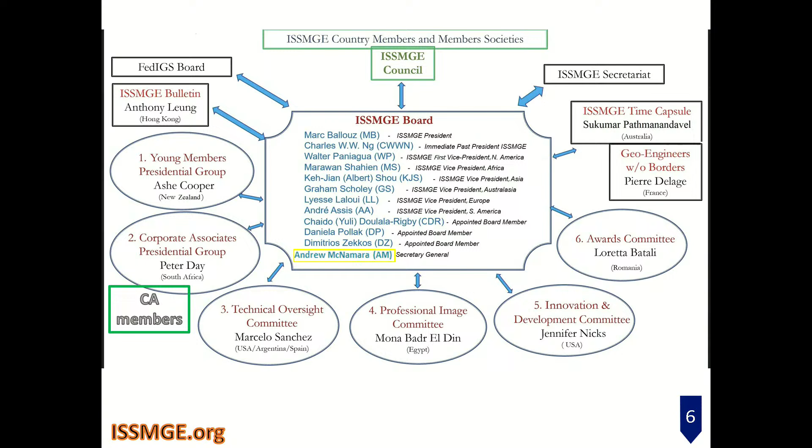The structure, you can see it on our website, issmge.org, is the council with the 90 country members, and the executive board with the president and 6 vice presidents. We are lucky today to have Professor Laloui, the vice president representing Europe, with us. So we are 2 from this group today.

This board will stay for another 2 years, since we were elected in May 2022, until Vienna, the biggest international conference, where I hope all of you will be joining us.

We also have 6 board-level committees helping the board and 3 ongoing projects. I won't go into details with these, but I'll cover mainly the working horse, the Technical Oversight Committee, which has about 40 subspecialties. Many of you are active members in those technical committees, and I see chairs of some of them. These are subspecialties of geotechnical engineering.

For the students, I don't see many young students here, maybe next time, but I encourage you to apply for the ISSMGE Foundation that will support you attending conferences worldwide.

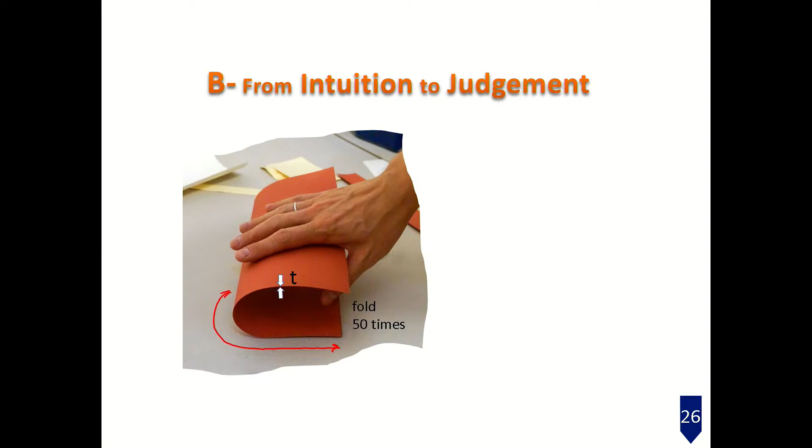Another intuition test: if you take a piece of paper and fold it 50 times, how thick will it be? 10 centimeters? 1 meter? It can actually reach beyond the moon. These tricks show us that intuition is bad in engineering. Always use calculation, and then judgment.

Another thing I like to talk about is a principle I teach my students: SoLGeH.

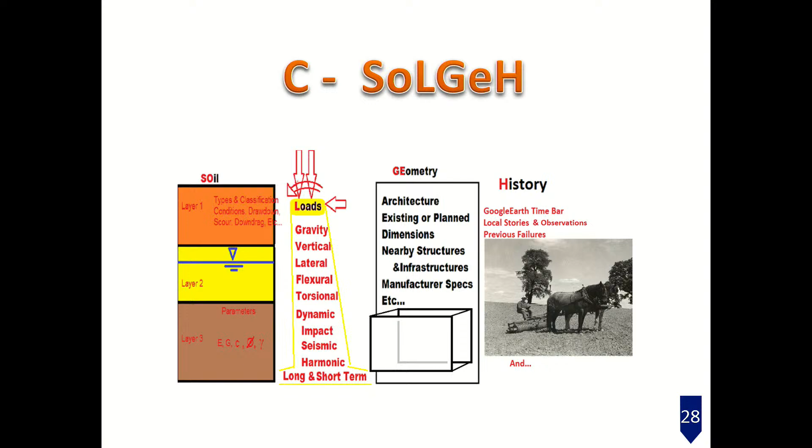Before you answer any engineering problem, get the data. Once you get the data, the soil, the loads, the geometry, and very important, the history, especially if you're checking a failure. Always visit the site, that's my recommendation. And then study, study, and study what's happening, the mode of failure, what theory to apply.

Don't jump on the software directly. This is where you get the strong triangle of safety, cost, and functionality. Anybody can build a bridge, but it will either collapse or cost very much if it's not an engineer doing it. So in summary, run sophisticated thinking before running Plaxis, sorry Daniel, but use as many data as possible and many methods, including the latest technology. So this is my message.

Live your engineering means it's time to drink. What do I mean by live your engineering? It means engineering is in our everyday life. So if you're putting water in your glass, you can check that there is atmospheric pressure, simply. Or you can check the centrifugal force.

You can drink. You can check many things. I use forks to keep my jacket straight, but you can also check sum of forces equals 0, sum of moments equals 0. Using simple forks, you can also... one more, let me see. This one, I need your prayers for. I'm sorry, I may make a mess.

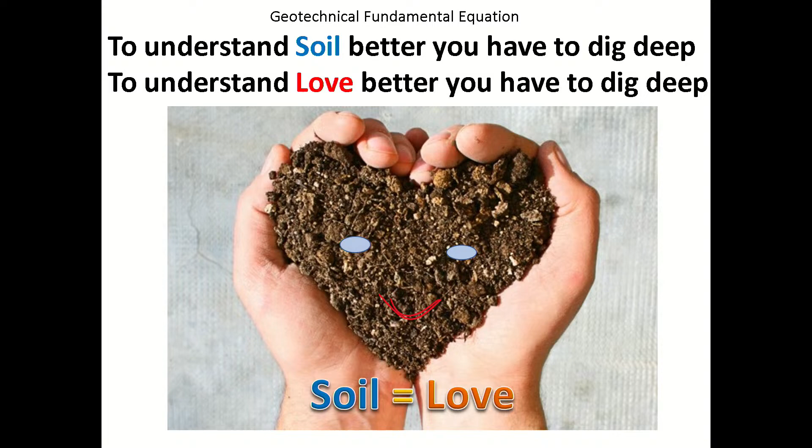So enjoy it. I have one last slide, about the fundamental equation of geotechnical engineering. So this is my only equation before I give the floor to the wonderful technical presentations. So to understand soil better, you have to dig deep. To understand love better, you have to dig deep. So soil equals love. Enjoy this conference. Thank you very much.

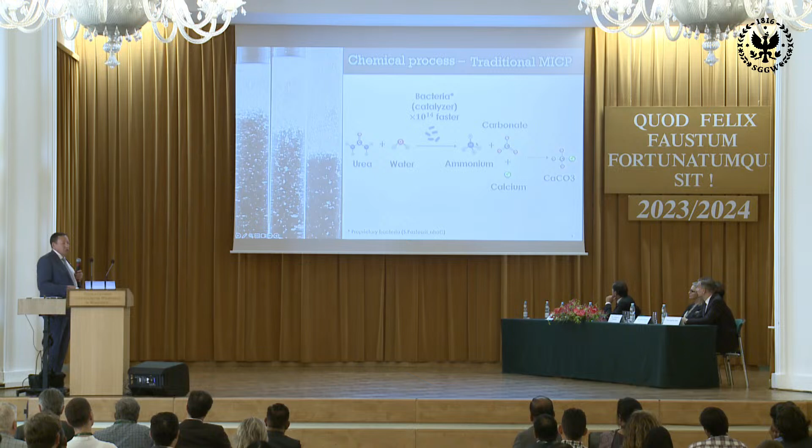There is an issue with having ammonium put in the soil, because this also creates pollution. So in our case—and we are the only ones doing this, we are actually patenting it—we extract ammonium before putting it in the ground. Medusoil is the name of our company. So we extract this ammonium, and we reach the same result in the ground without ammonium.

So the idea is that the precipitated calcium carbonate now goes into a porous material, into your soil. Basically, we try to have this calcium carbonate precipitating inside our porous material. This is the goal, and this is the challenge, basically.

So again, let me compare this on a granulometric curve with respect to many technologies you are all probably familiar with, from chemical grout to compaction grout to jet grouting, for instance. What biocementation could cover is this type of grain size—so we are covering almost the entire range of materials we work with. So that's it about the big picture of the technology.

So now we have to look at how we can really design an injection process, how we can ensure the results we are looking for. As I mentioned before, just to remind you, especially those who are not familiar with this—there are two technologies, or two ways to handle things, for the same technology. The first one is what we call conventional or traditional MICP, where the reaction with ammonium happens in the soil.

I would say this is the largest practice, the one we do in our case where we extract it from the soil. In terms of designing things, we generate two ways from a mathematical perspective. Basically, if you extract the ammonium before injecting it into the ground, what you have to consider in your reactive transport is mainly the calcite precipitation. You don't need more, because everything is made in the bioreactor before injection, so you do not simulate it in your analysis. However, in traditional MICP, we simulate bacteria attachment on the grains and their decay, and we simulate all the other reactions, including calcite precipitation. So how do we do this?

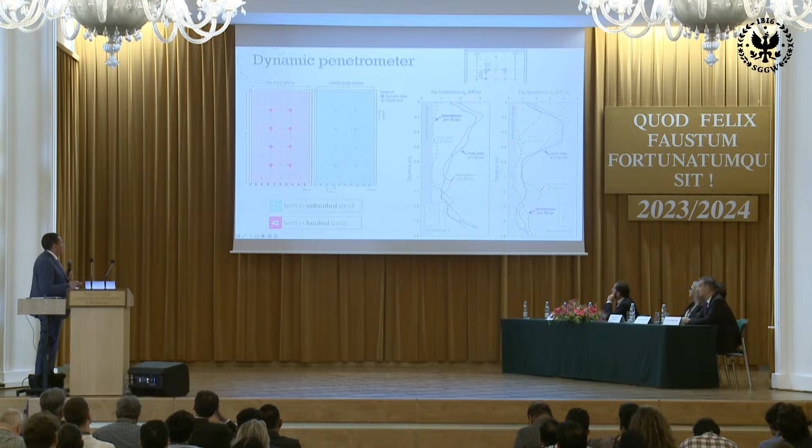What you see here are two values of the dynamic penetrometer results at a short distance—one at 20 centimeters and the other at 75. These are the values before treatment, and now you get the tip resistance in the ground after treatment. As you can see, we are moving from almost 0.5, if not 0 megapascal, to 3 megapascal of improvement in the ground.

We then look at two different ways to ensure homogeneity, for instance by using slip pipe systems—here we can go up to almost 4 megapascal. We can go even further, for instance if we use a tube manchette system, after different injections—in this case three injections into the ground—we can reach almost 20 megapascal of tip resistance.

Now the question is, how are we able to simulate and predict the mechanical behavior of the material after cementation? Before going into that, let me show you some more ways the model was validated.

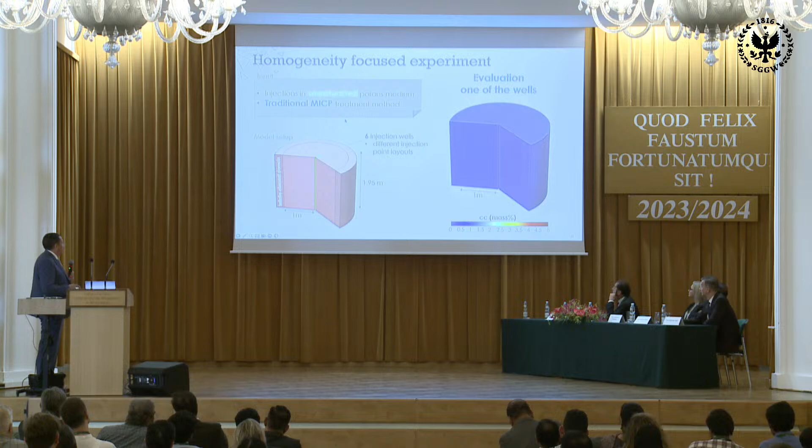Second and last case, we look at a single well. Here we are in partially saturated conditions with the traditional MICP process, and again we look at different configurations to optimize the process. We do it now numerically, because we don't need to run this parametric analysis experimentally—we have confidence in the model, and we can see how much calcite we can get.

An important aspect here is that we can control and manage the calcite—we don't need to work with the same calcite values all the time. So to come back: I discussed the injection process, I discussed the transport, and I discussed the reaction.

The last remaining item is the mechanical behavior—how much strength we get after injection. Here are unconfined compressive strength tests that we did a long time ago. Basically, what you see is that the compressive strength increases with the increase in the amount of calcite precipitation that you put into the ground.

The same thing happens with stiffness—this is the Young's modulus plotted against calcite precipitation, and again we see the same trend. From this, we concluded that we can actually create categories of improvement depending on the needs.

So for instance, if you are dealing with liquefaction and erosion protection problems, a small amount of calcite is sufficient to create the needed cohesion in the material. If you have to increase the bearing capacity, you can increase the dosage a bit and go for something with higher strength, almost 12 megapascal, as I was mentioning.

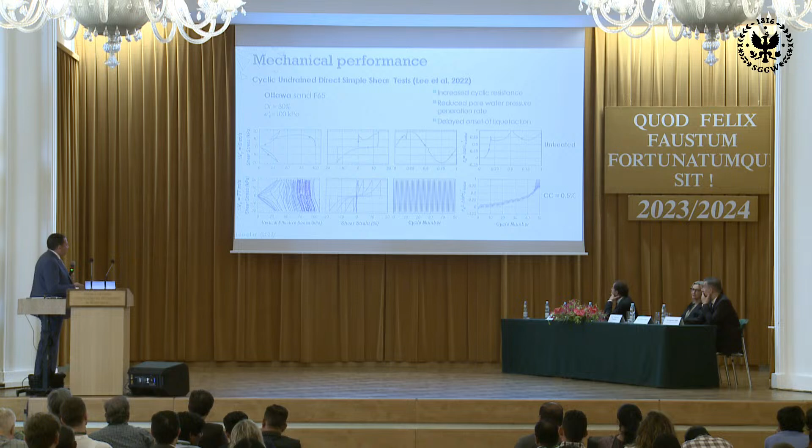The last experimental result, which is not from our group, is a cyclic direct shear test where the authors, Lee et al., tested first a material that is not treated, and then tested the same cyclic behavior of the material after a small treatment, 0.5% calcite content. The number of cycles needed to get to liquefaction is huge. With this, we are decreasing significantly the liquefaction potential with just 0.5% of calcite precipitation.

So we try to understand what are the physical processes behind this change in the rheology of the behavior, to be able to incorporate them in a constitutive manner. For that, we move to really fundamental science, going to very small scale, 0.1 millimeter, and use what we call microchip technology with microfluidics.

I will show you results of two cases that have the same porosity, but different distributions of grains. The system is based on injecting first, with a syringe pump, our bacteria solution from one side, then injecting from the other side our cementation solution, which is mainly urea, and we use cameras to follow what is happening in the PDMS chip. So basically this is the type of result we can get - I'm showing results almost in the middle of our 1 meter long chip.

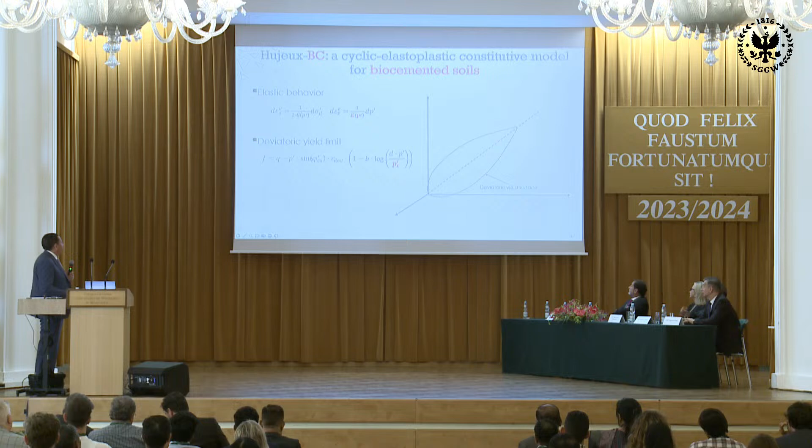It's a nonlinear elasticity model, an elastoplastic model. It has a yield limit very similar to CAM clay. For those familiar with CAM clay, there are just a few differences: instead of the capital M, it's a sinus here, and it has this shape because it has a fourth mechanism that cuts in the isotropic limit. So this is the elastic domain. It's a model like any other model.

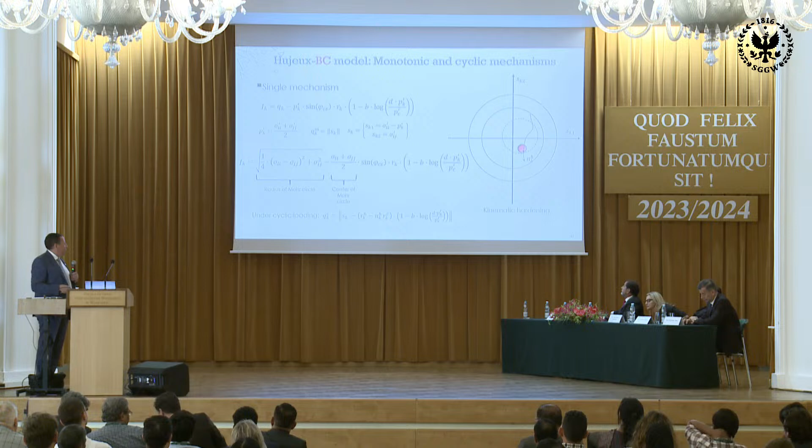It's of interest for us because it has a cyclic mechanism in the behavior. So what does it mean? I write the same equation I was showing before, in a different mathematical form that allows us to normalize things in terms of circles. So in one of the mechanisms, this would be our elastic domain, and when you load your material, you have a hysteretic domain, and when you unload it, you have plasticity and unloading. This is what we call kinematic hardening, and that's the motivation for us in using a model with kinematic hardening.

In this model, we introduce the two processes I mentioned before. First, densification, which we do in an elastic part and a plastic part. The elastic part we do by changing the bulk modulus and shear modulus, because by changing this coating of crystal around the grains, we are changing the bulk modulus and shear modulus, and we do it in this mathematical way, relating it to the amount of mass precipitating in the soil.

From the plasticity part, this precipitation around the grains is reducing the volume. So basically we represent a reduction of the volume, and if you reduce the volume on the normally consolidated line, you are changing your pre-consolidation stress.

The other aspect is bonding, as I mentioned. We do this for elasticity and plasticity. Again, we introduce a new coefficient for the elastic parameters. What's more important for the plastic part is that this bonding coefficient represents the fact that at very high shear stress, we will have destruction of those bonds. So we will move from a large normally consolidated line back to the untreated normally consolidated line, like we do for structural materials, for instance.

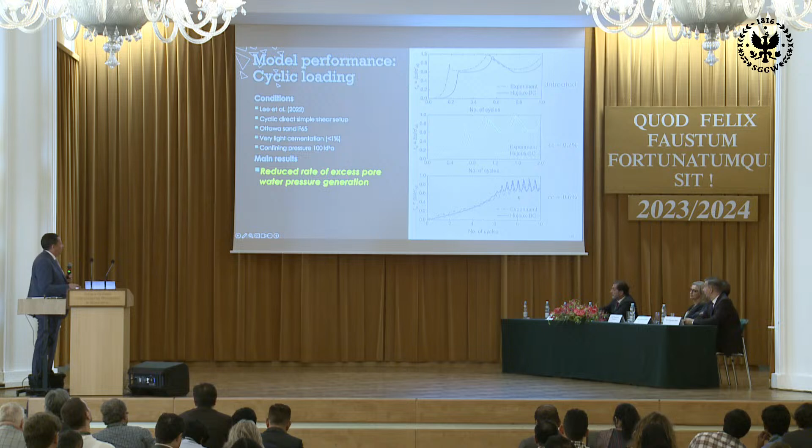However, now what we are showing is how this liquefaction potential is decreased by increasing the calcite amount in the soil, and you can see the model is able to represent even the number of cycles needed to reach liquefaction. The last curve related to model performance shows the same results as before, but here represented in terms of number of cycles to liquefaction.

This is the cyclic stress ratio. And again, you see the comparison between the experimental results and the numerical model is pretty good.

Last aspect: based on all those things, we moved to the industrialization process. What we first achieved is that we developed 3 patents to protect the technology - first the system injection, then the extraction of ammonium before injection, and also coupling this with geosynthetics. So we did that, and we built a company to commercialize those things.

The principle of industrialization is the fact that we have zero-waste manufacturing. Those manufacturing units could be on site, but we also have mobile manufacturing or production units. Currently, for instance, we've had a project for 2 weeks in Romania where we shipped our mobile unit. Basically, we grow everything in a bioreactor, then come on site, inject our solution from one part, and from the other part we provide calcium that's available anywhere, generating calcium carbonate in the ground.

What is biochar? There is no universally accepted definition of biochar. There are some agencies like the International Biochar Initiative that have a definition. US Biochar Initiative has its definition. European Biochar Certificate has its definition. The International Union of Pure and Applied Chemistry has a definition. US Department of Agriculture has a definition. Biochar International, one organization, has a definition. And the Institute of Food and Agriculture at University of Florida has its own definition. So there are many different definitions given by different agencies.

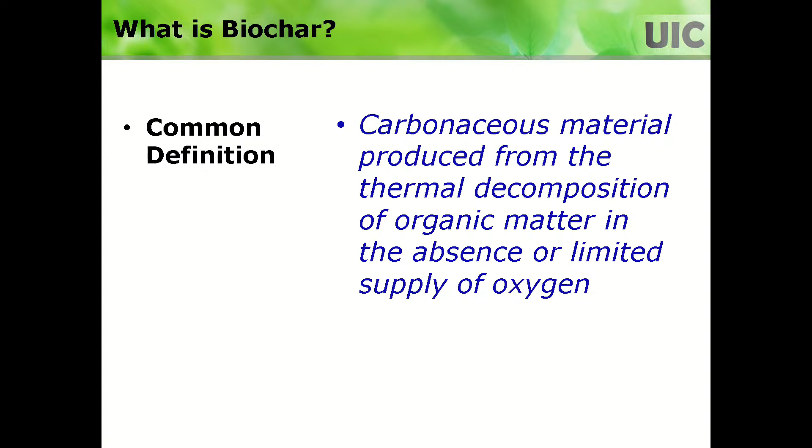But you don't have to get confused with all those definitions. You should know this common definition. Biochar is nothing but a carbonaceous material, basically a carbon material, that is produced from thermal decomposition of organic matter in the absence of, or with limited supply of, oxygen. So basically it's created from a thermal process of organic matter in the absence of oxygen. That's the basic definition, if you can remember that, that's fine.

As I said, biochar is basically produced from biomass, and biomass could be anything, as you see here. You feed it into this thermal heating unit called pyrolysis, and in this process you heat it up to a certain temperature without letting any oxygen in. When you do that, you get biofuel, syngas, and pyrolysis products. This has been going on as a way to produce alternative energy. A lot of people who work in the energy area work on this because they're converting organic waste into energy, but as a byproduct you get this material called biochar, similar to charcoal.

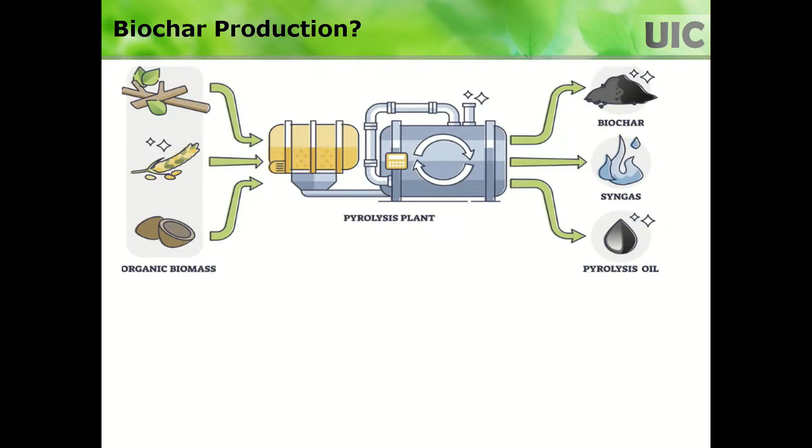Pyrolysis is basically heating up organic matter at temperatures ranging from 300 to 800 degrees centigrade. Depending on how you do pyrolysis, it can be classified into two types. Slow pyrolysis is where you slowly increase the temperature to the highest desired value, which could take several hours. Fast pyrolysis is when you don't wait, you just heat the biomass up to the desired temperature quickly, taking only a few minutes.

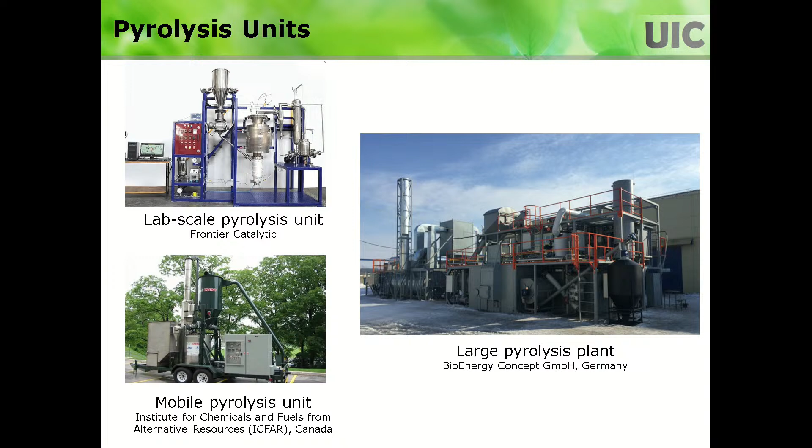These are the pyrolysis units, you can get lab scale, mobile scale, or very large units, which is nice. If you want to create biochar at your project site, you can do it, you don't have to have a huge plant like this one. You can have a mobile plant and do the project wherever you want.

And there are other biochar production methods other than pyrolysis. One is called gasification, another is called hydrothermal carbonization, another is called torrefaction. So you need to remember there could be processes other than pyrolysis to produce biochar.

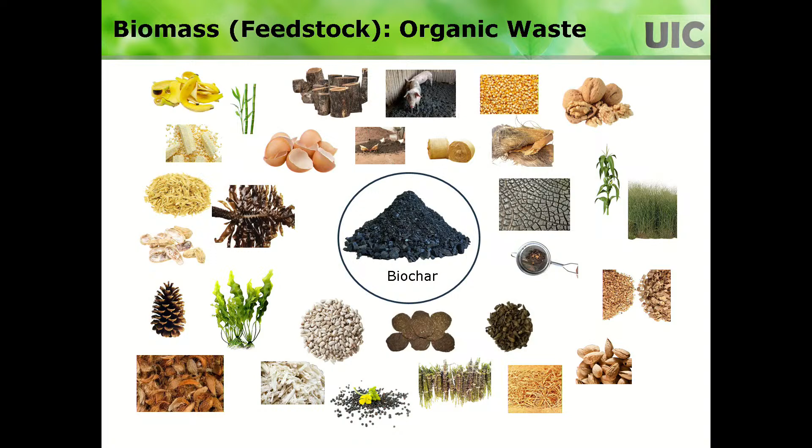So biochar is produced from biomass. Biomass is basically organic waste. Look at all these types of organic mass - banana peels, like all these things. You can have chicken litter or pig litter, sludges. You can see all kinds of stuff like rice husk, all the organic waste that you have, that can be converted into biochar. So biochar is made from organic waste. In terms of waste management, organic waste is very difficult to get rid of. So here you can use the organic waste to produce biofuels, bioenergy, and also biochar.

So I'm giving you some idea about the different types of biochar. All this information is in my paper that's going to be published in this conference proceedings. There are different types of wood-based organic waste, then different types of plant-based organic waste - right here you can see it. And you could have animal-based organic waste - you can see this one. And you could have other waste like sewage sludge, municipal solid waste, all these organic waste. Any type of organic waste that you have can be used as biomass or feedstock for creating biochar.

In terms of the quantities of organic waste we generate, it's a lot of it. Agriculture waste, for example - we create 1,000 million tons per year, and that keeps on accumulating if you don't do anything. Municipal solid waste is 2,000 million tons per year, but out of that, more than 40% is organic mass. So you have an organic fraction, and all this can be converted into biofuel and bioenergy.

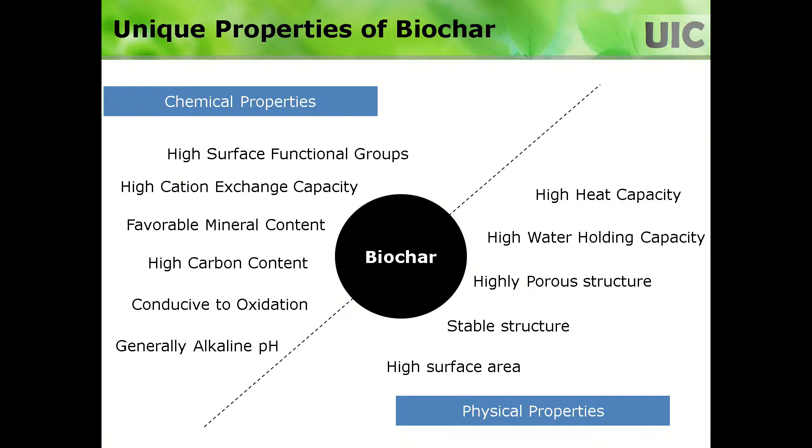And it has unique physical properties - high heat capacity, high water holding capacity, highly porous structure, which is very important. And it has a stable structure - it does not degrade, so the biochar is going to last for a long time. And then it has high surface area. These are very unique physical and chemical properties that you can exploit for various applications.

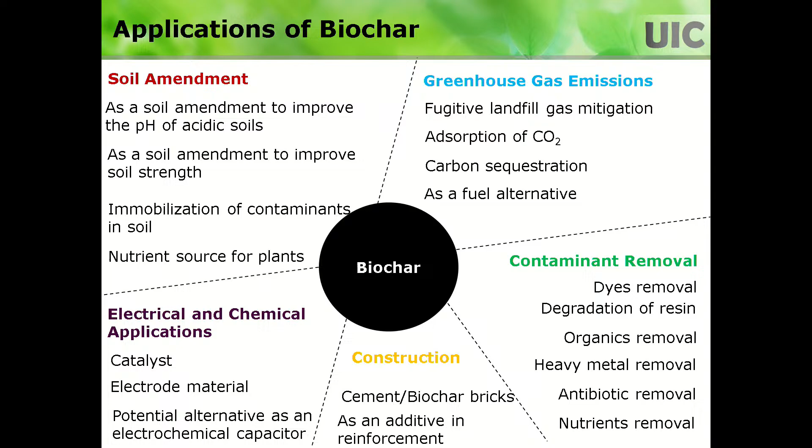Now there are many different applications. You can use it as a soil amendment for different purposes I listed there, and you can use it for greenhouse gas emissions control - there are many applications there I mentioned. For contaminant removal - water, air, soil, wastewater - you can use this material for that. And you can use it as a construction material also. Not only in the civil engineering field, people are using it in electrical and chemical applications too. So many applications for this material that is made from biomass, from organic waste.

Let's say you are working on some project and you need a material, but the biochar does not have the properties that you want. Why? Because it has a limited contamination range. Let's say if I'm dealing with wastewater, industrial water, or contaminated soil, this material may not be good as it is, as a biochar. Limited adsorption capacities, limited anionic capacity, high ash content, impurities, high volatile content, low density, small particle size, low active sites, harder to separate from aqueous media, and high dependence of the properties of biochar on the preparation conditions and feedstock.

So those are the problems. But you cannot be discouraged by those problems. If those problems are not favorable to you, you can modify them. That's called engineered biochar. So you can modify the biochar in different ways.

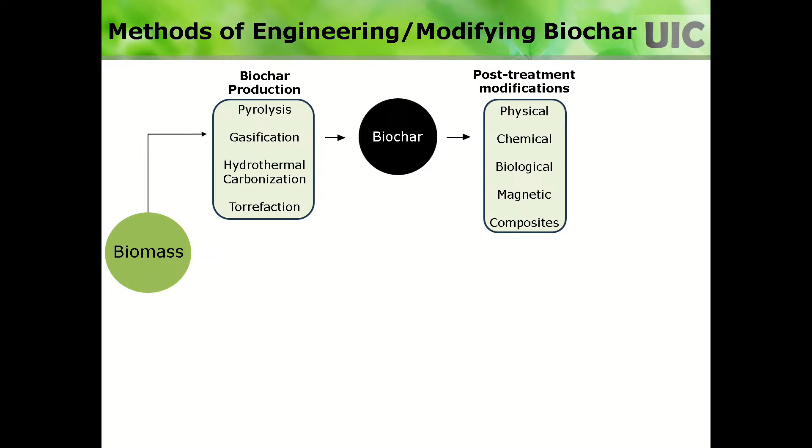So here you have a biomass, and you do the pyrolysis process, these different processes, and then you produce the biochar. And then this biochar does not have the properties that you want, so you need modifications. This is the post-treatment modification. There are different types of modifications: physical, chemical, biological, magnetic, and you can create composites. When you do that, you get an engineered biochar or modified biochar.

And this can be done in different ways. You can treat the biomass first, creating a modified biomass, and then subject it to pyrolysis, and you can also get a modified biochar. So whichever route you take, the treatment is either a post-treatment or a pre-treatment. You can do it either way, and you have these different options to do that.

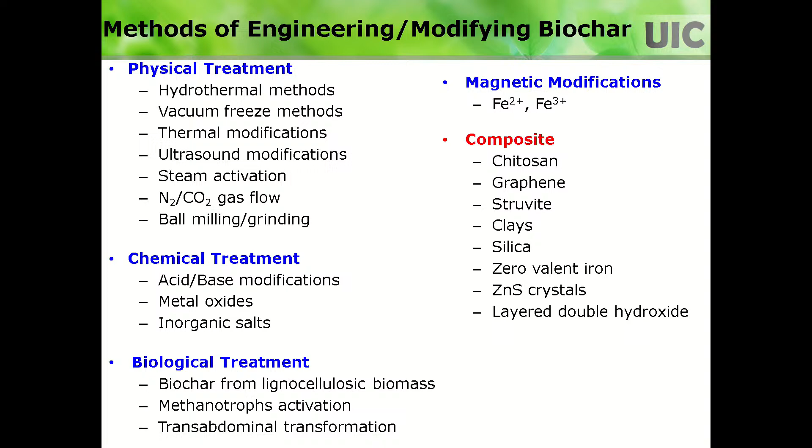Now, in the physical treatment, if I want to do the treatment, there are different ways to do it. If I want to do the chemical treatment, there are different ways to do it. If I want to do the biological treatment, different ways to do it. Magnetic modifications, you can do it too. And you can combine biochar with other materials to create a biochar composite.

And in my paper, I provide all these details, so don't worry about losing this information. Now, the treatment that you do has to give the improvement that you are looking for. Biochar as it is doesn't have the properties, but you are looking for some improved properties.

And you need to tailor the treatment to get the improvement that you want. For example, among the physical methods, you can just do ball milling, which basically reduces the size. People create nano biochar, which has high surface area and unique properties to serve certain functions based on the nano size.

So like that, if you look at the chemical methods, for example, if I use a certain kind of modification, I can get a high surface area. And then I can use the biological process, activate it with microbes, and get a bioactive biochar.

And you can use composites. You can add biochar with any of these materials, including clays. For example, we are working on a composite biochar, a chitosan composite, that can give very unique characteristics to the biochar that can help us in our applications.

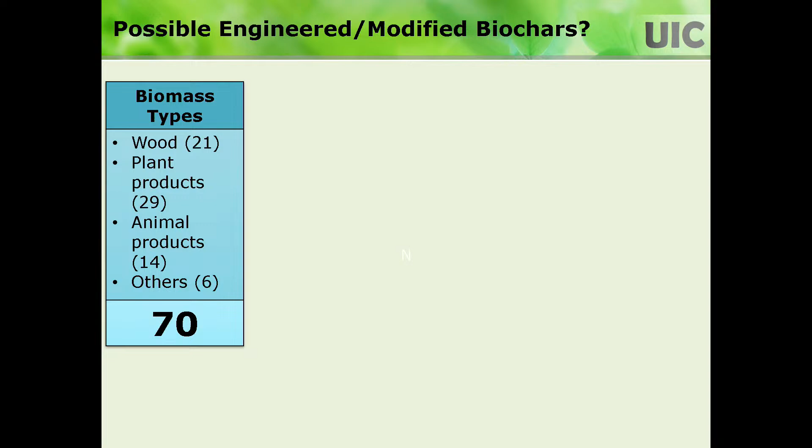So now let me summarize what I said. Biomass type: what are the different types of biomass? Based on the literature that we found, there are more than 70 types of biomass people have used to create biochar. Now, what are the different ways to produce the biochar? There are 4 different ways to produce a biochar.

And then in the production method, you have variables. What is the highest heating temperature? What is the residence time? What is the heating rate? The combinations of those can result in 1,890 combinations.

And then modifications: after you make the biochar, if it is not good enough, you have to do pre-treatment or post-treatment, which can be physical, chemical, biological, or magnetic. That combination is 31, so let's say permutations and combinations. How many types of biochar can you have? So 70 times 4 times 1,890 times 31, that leads to 16 million types of biochar.

The point I want to mention is when you are looking at the literature on biochar, be mindful about what is the feedstock, how it is produced, and what are its characteristics. You may be talking about different material. Everybody uses the word biochar in the title, but out of 16 million possible biochars, which one are you talking about? This is important to remember.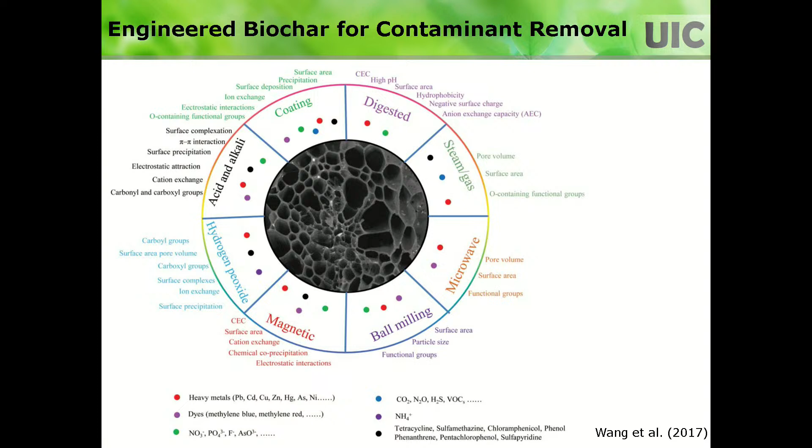It's unique, because if I work on contamination remediation, look at this: when you modify the biochar, you get unique properties that can take out different types of contaminants, as I'm showing here. So for environmental remediation applications, modified biochar is the best option you can think about.

We do a lot of research on biochar at UIC, for a long time now, at least 15 to 20 years. These are the kinds of projects we worked on: using it as a filter media for stormwater treatment, as a biocover for enhanced landfill methane oxidation, to stabilize heavy metals in contaminated soils, and as an organic amendment in phytoremediation projects. We also have a project going on right now creating biochar-chitosan or biochar-chitosan-bentonite composites for barrier applications.

You can also use it for geotechnical purposes. If you're interested in improving mechanical strength, you can use this too.

One thing I want to mention is a lot of studies just deal with lab scale work. But you really need to go out to the field and see if what you found in the lab is applicable or not. When doing full scale applications, you need to look at your source of biochar, because a lot of people make biochar in the lab using small reactors, 100 or 200 grams, and do research on that. But in the field you need tons of material, so you need to find where you can get that much material and match it to what's available for field applications.

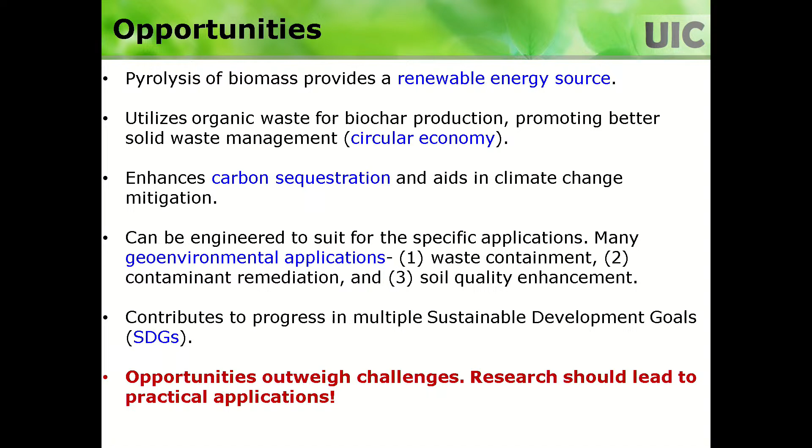The last point I want to mention is that opportunities outweigh challenges. The challenges should not be discouraging to you because the opportunities are really much greater, but you should focus the research not just on limited lab scale, but take them into applications.

You can achieve desired properties of biochar by selecting appropriate modification techniques. And you can achieve sustainability benefits provided you are careful about how you use it and in which applications. You need to do the assessment and make sure it is right. The biggest concern is that we don't have standards for production, properties, and applications. Hopefully those are going to come up very soon.

Let's see now how sustainability criteria may be applied to the design of landfill lining systems.

The application of sustainability criteria to the design of contaminant barriers implicates balancing two conflicting needs. The first need is to maximize the protection of groundwater quality.

The traditional method to meet this need is to increase the thickness and reduce the hydraulic conductivity of the low permeability mineral layers of the lining system. The consequence is accepting high economic cost, elevated consumption of natural raw materials, and substantial emission of greenhouse gases for the transportation of raw materials and the construction of the lining system.

The second need is to reduce the economic and environmental impact of barrier construction. This second need requires reducing the use of engineered barriers and relying on natural attenuation processes which are affected by high uncertainty. In this case, the consequence is accepting a possible high risk for human health and environment given by the contamination of the groundwater.

Now, from my point of view, a fundamental innovation that has been developed to face this problem is represented by the transition from a prescriptive-based design approach to a performance-based design approach.

The performance-based design guarantees to protect the groundwater resource, avoiding recourse to oversized lining systems with relevant economic and environmental savings. The modeling of contaminant transport that takes place through mineral and geosynthetic liners allows for a rational design of the barrier system components.

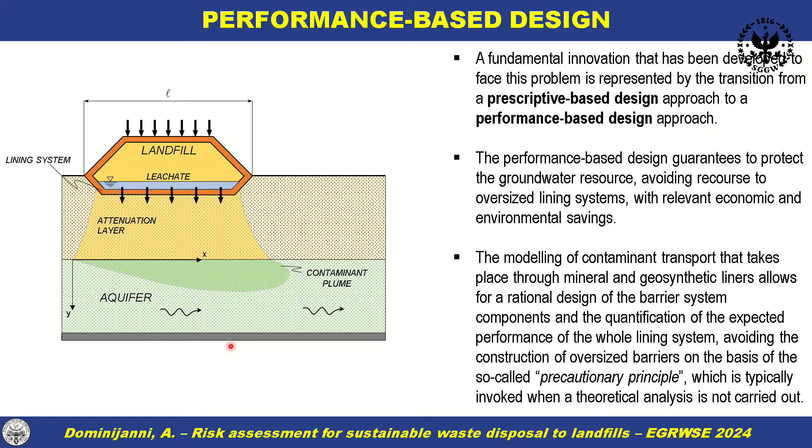and the quantification of the expected performance of the lining system, avoiding the construction of oversized barriers on the basis of the so-called precautionary principle, which is typically invoked when a theoretical analysis is not carried out.

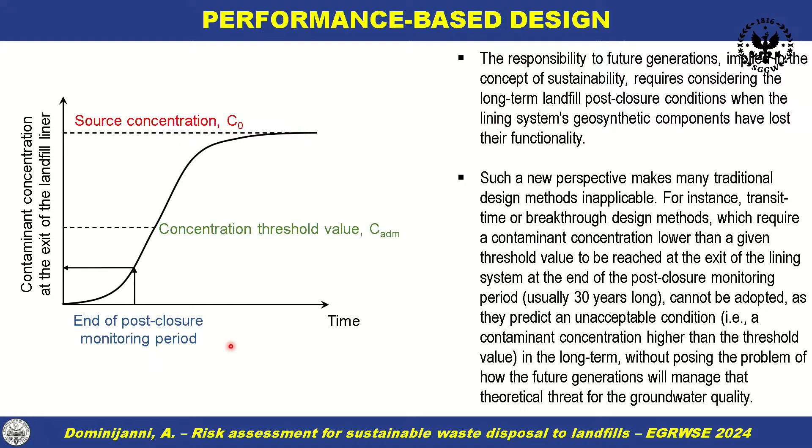However, we must take into account that the responsibility to future generations, implied in the concept of sustainability, requires considering also the long-term landfill post-closure condition when the lining system's geosynthetic components may have lost their functionality. Such a new perspective makes many traditional design methods inapplicable. For instance, transit time or breakthrough design methods, which require a contaminant concentration lower than a given threshold value at the exit of the lining system at the end of the post-closure monitoring period, cannot be adopted, as they predict an unacceptable condition in the long term—that is, a contaminant concentration higher than the threshold value, without posing the problem of how future generations will manage that theoretical threat to groundwater quality.

An alternative method is to adopt the performance criterion that the risk for human health and environment remain less than an acceptable threshold level at the point of compliance, not only during the prescribed post-closure monitoring period, but also in the long term.

The risk for human health is typically determined by the ingestion of groundwater or inhalation of vapors coming from the groundwater, and can be related to a corresponding contaminant concentration in the groundwater through a toxicological model. The risk for the environment is similarly related to protective threshold values of the contaminant concentration in groundwater, which are typically defined by the regulation in force.

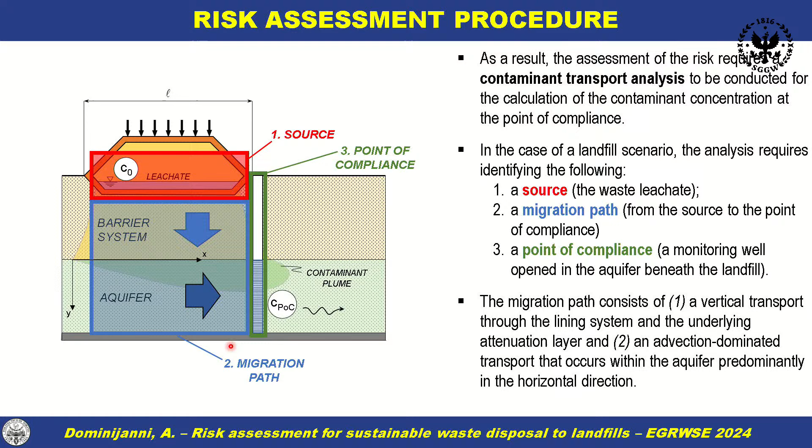As a result, the assessment of risk requires a contaminant transport analysis to calculate the contaminant concentration at the point of compliance. In the case of a landfill scenario, the analysis requires identifying a source, that is the waste leachate, a migration path, and the point of compliance. The migration path consists of vertical transport through the lining system and the underlying attenuation layer, and an advection-dominated transport that occurs within the aquifer, predominantly in the horizontal direction.

These concepts are beginning to be included in the environmental regulation of various countries. For instance, in 2020, the requirement to carry out a risk assessment analysis was introduced in the Italian regulations for landfills, the so-called Decreto Legislativo 36 del 2003, for the following cases: when local authorities must authorize particular subcategories of landfills, when requesting a derogation from the permissible concentration limit values in the waste leachate for landfills of non-hazardous waste, and at the end of the post-closure monitoring period, whose duration is typically assumed to be 30 years after the end of the waste disposal activities.

Now, several modeling approaches can be adopted to analyze the contaminant migration process in the context of a risk assessment procedure. A first classification of possible modeling approaches may distinguish between steady-state and transient models. Transient models take into account the finite mass of the source and time-dependent phenomena, such as radioactive decay, biological degradation, sorption, desorption, and ion exchange. They are computationally demanding and require several chemical, physical, and biological data.

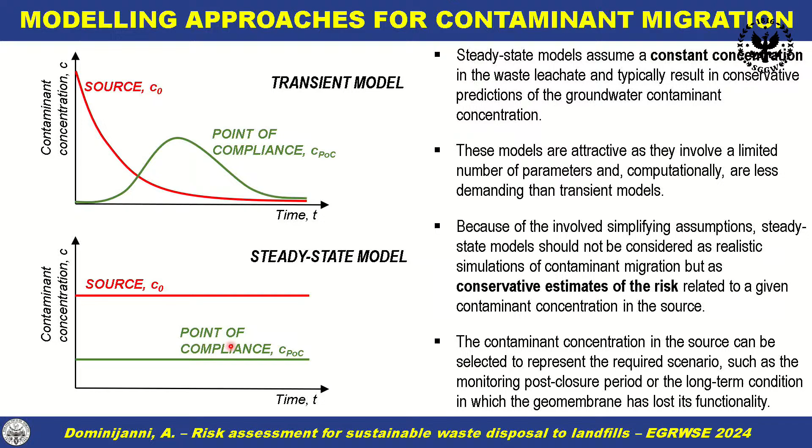I want to stress that because of the involved simplifying assumptions, steady-state models should not be considered as realistic simulations of contaminant migration, but as conservative estimates of the risk related to a given contaminant concentration in the source. This concentration in the source can be selected to represent the required scenario, such as the monitoring post-closure period or the long-term condition in which the geomembrane has lost its functionality.

Now, I would like to describe a set of analytical and numerical solutions to contaminant transport from landfills that have been developed to assess the risk for human health and environment.

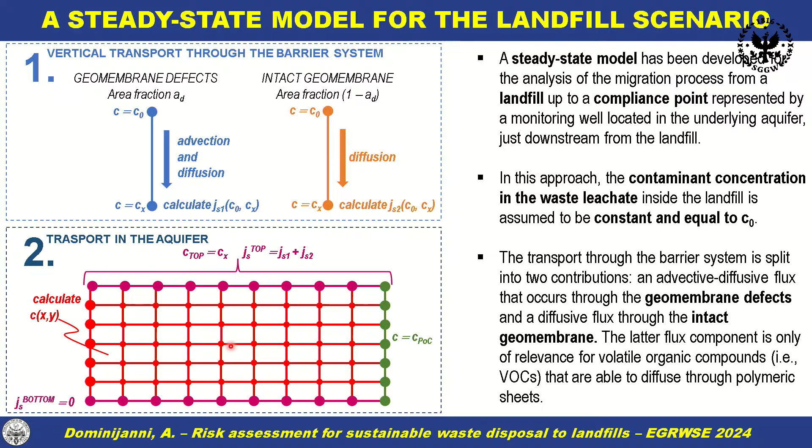This solution has been derived from a steady-state model developed for the analysis of the migration process from a landfill up to a compliance point represented by a monitoring well located in the underlying aquifer just downstream from the landfill. In this approach, the contaminant concentration in the waste leachate inside the landfill is assumed constant and equal to C0. The transport through the barrier system is split into two contributions: an advective-diffusive flux that occurs through the geomembrane defects, and a diffusive flux through the intact geomembrane. The latter flux component is only relevant for volatile organic compounds that are able to diffuse through polymeric sheets.

The vertical contaminant flux through the barrier system, given by these two contributions, is expressed through an analytical solution, which can be imposed as the top boundary condition for the contaminant mass balance in the underlying aquifer. The contaminant concentration in the aquifer can be obtained, in the most general case, from a finite difference numerical solution.

I will now describe the most significant step of the proposed method.

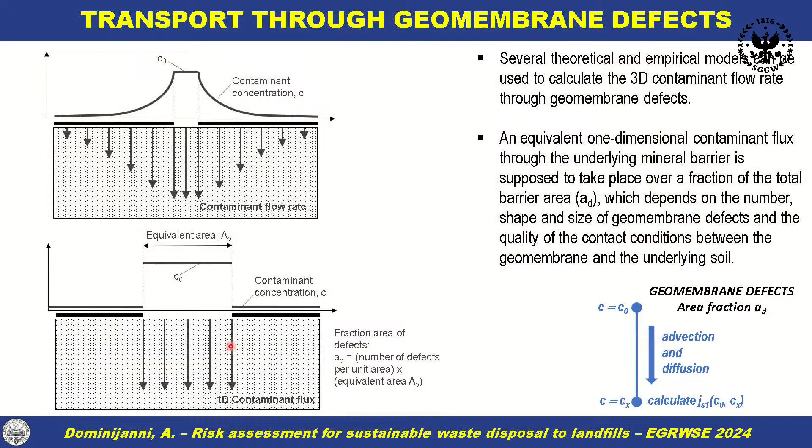The second step consists of calculating the diffusive flux through the intact geomembrane. This transport process is relevant only for volatile organic compounds, which can partition into the geomembrane polymer and diffuse through it relatively rapidly due to the limited geomembrane thickness. The steady-state flux through the intact geomembrane is assumed to take place over the area fraction that is complementary to the area fraction evaluated for transport through geomembrane defects.

When the vertical contaminant transport through the barrier system has been evaluated, the contaminant concentration in the underlying aquifer can be derived from a mass balance. If the thickness of the aquifer is no more than a few meters, the pollutant concentration can be assumed to be invariant with vertical position and to depend only on the horizontal distance below the landfill.

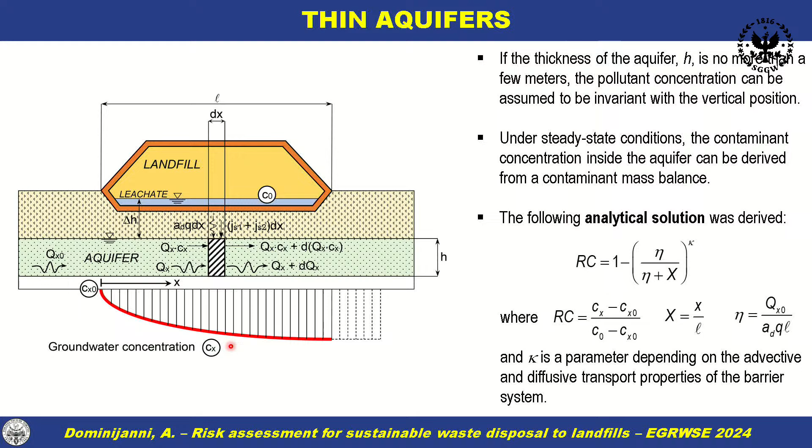Under steady-state conditions, the analytical solution shown in this slide can be derived. In this equation, RC is the relative concentration, C0 is the contaminant concentration in the leachate waste, CX0 is the contaminant concentration in the groundwater upstream from the landfill, eta is the relation between the horizontal and vertical flow rate within the aquifer, and kappa is a parameter depending on the advective and diffusive transport properties of the barrier system.

When the thickness of the aquifer is not limited to a few meters, the variation in pollutant concentration in the vertical direction becomes significant, and a two-dimensional geometry needs to be taken into account. In this case, the contaminant concentration distribution depends on the transversal dispersivity within the aquifer. A general solution can be found using the finite difference method by imposing the continuity of contaminant concentration and flux between the bottom of the barrier system and the top of the aquifer.

I would like now to present an example of the application of the proposed solutions. This example shows how the derived steady-state solutions can be employed to assess the risk for the following two scenarios: the monitoring post-closure period, which is typically assumed to end 30 years after the termination of the waste disposal activities, and a long-term condition in which the geomembrane has lost its functionality.

The artificial lining system, in accordance with Italian regulations for landfills of non-hazardous waste, includes from the top a 0.5 meter thick drainage layer, a 2.5 millimeter thick geomembrane in HDPE, a 1 meter thick compacted clay liner, which represent, using the terminology of the European Directive 31 of 1999, the so-called artificial mineral barrier, and another 1 meter thick compacted clay liner that represents the so-called artificial completion of the geological barrier.

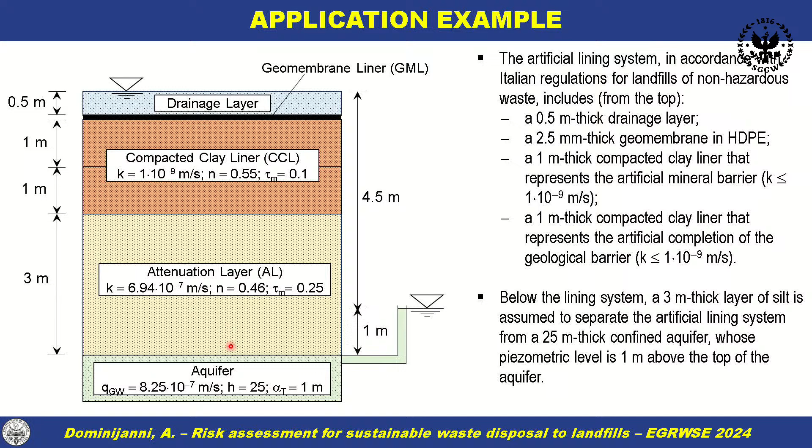Below the lining system, a 3 meter thick layer of silt is assumed to separate the artificial lining system from a 25 meter thick confined aquifer whose piezometric level is 1 meter above the top of the aquifer. The temperature at the base of the landfill is assumed to be about 20 degrees Celsius.

Therefore, the geomembrane service life is expected to last about 120 years, based on the indications given by Rowe and Brachman. As a result, during the monitoring post-closure period, the migration of inorganic contaminants consists only of the advective-diffusive transport through the geomembrane defects. However, organic contaminants can diffuse through the intact geomembrane, with a consequent relevant increment in the overall contaminant mass flux passing through the lining system and reaching the underlying aquifer.

The proposed analysis is performed for both cadmium and benzene to appreciate the different behavior of inorganic and organic compounds. The derived analytical solution for thin aquifers can be used to assess the variation of the contaminant concentration in the aquifer along the direction of the groundwater flow.

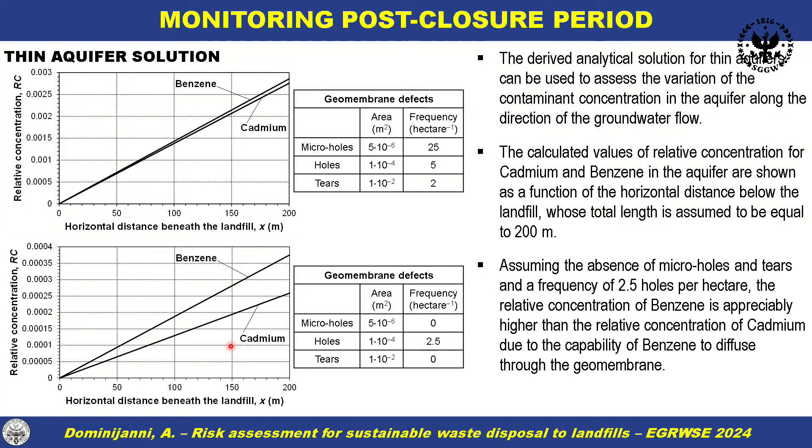The calculated values of relative concentration for cadmium and benzene in the aquifer are shown as a function of the horizontal distance below the landfill, whose total length is assumed to be equal to 200 meters. Assuming the presence of microholes, holes, and tears with the areas and frequencies shown in the table at the top of the slide, the concentration profiles for cadmium and benzene are similar.

Considering a better performing composite barrier with only 2.5 holes per hectare, the relative concentration of benzene is found to be appreciably higher than the relative concentration of cadmium, due to the capability of benzene to diffuse through the geomembrane.

The maximum relative concentration is found at the exit from the landfill footprint, which typically represents the point of compliance for the risk assessment. The procedure allows the admissible concentration of contaminant in the waste leachate to be assessed. This admissible concentration in the waste leachate is given by the relation between the threshold concentration in the groundwater, given for instance by the regulation in force, and the calculated relative concentration at the point of compliance.

Using the value of 5 micrograms per liter for the threshold concentration in the groundwater given by the Italian regulations, the admissible concentration for cadmium is found to be 1,786 micrograms per liter. Similarly, assuming a threshold concentration in the groundwater of 1 microgram per liter for benzene, the admissible concentration in the waste leachate is found to be 345 micrograms per liter.

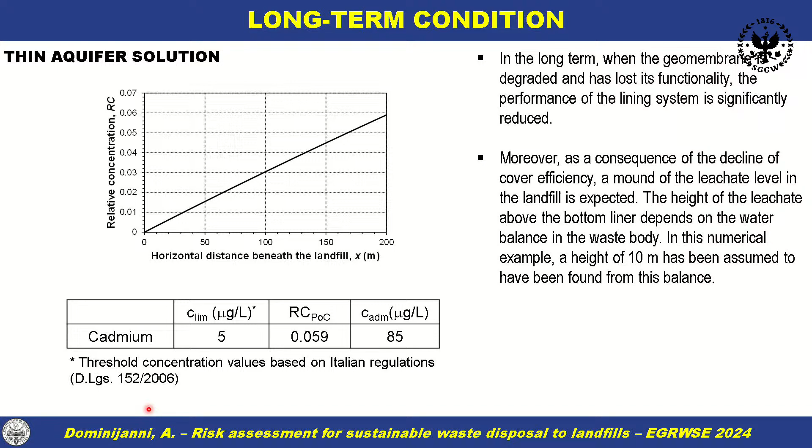The second considered scenario is that in the long term, when the geomembrane is degraded and has lost its functionality. Under such conditions, the performance of the lining system is significantly reduced. Moreover, as a consequence of the decline of cover efficiency, a mound of the leachate level in the landfill must be expected. The height of the leachate above the bottom liner depends on the water balance in the waste body, and in this numerical example, a height of 10 meters has been assumed, found from this balance.

Because of biodegradation, the concentration of organic contaminants is expected to drop substantially. Attention is therefore focused only on the migration of inorganic contaminants, such as cadmium.

Using the solution for thin aquifer, the maximum relative concentration is found to be equal to 0.059 at the exit from the landfill footprint. The corresponding admissible concentration in the waste leachate is 85 micrograms per liter, which is a value considerably lower than the value of 1,786 micrograms per liter found for the post-monitoring condition.

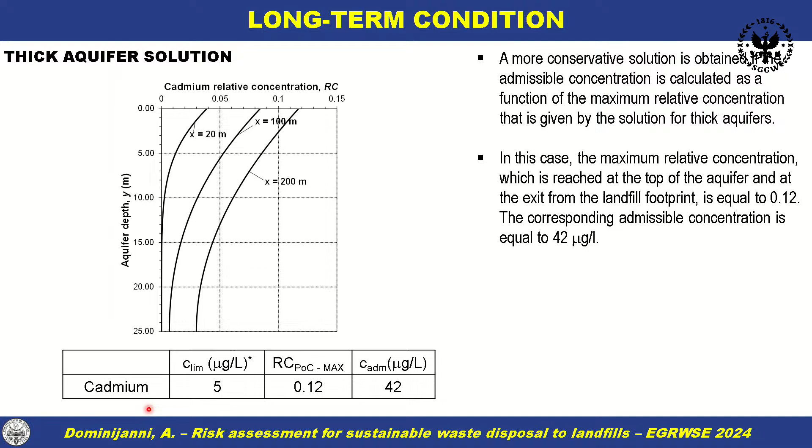A still more conservative solution is obtained if the admissible concentration is calculated as a function of the maximum relative concentration given by the solution for thick aquifers. In this case, the admissible concentration in the waste leachate is found to be equal to 42 micrograms per liter, which is about 50% of the concentration obtained from the solution for thin aquifers.

In conclusion, I would like to provide some final comments. This presentation has been focused on a proposed risk assessment procedure that is coherent with the ethical requirement of sustainability in taking care of the impact of our current activities on the quality of the environment for future generations. The rationale of the procedure consists of determining the contaminant concentrations in the leachate that are compatible with an acceptable risk level in the exposed groundwater resource, also considering the long-term conditions.

However, a last critical consideration should be made about the threshold concentrations that are established to preserve the quality of the groundwater, especially when their values are not related to actual risk for human health, but are defined as screening values based on the so-called precautionary principle. It should be taken into account that the threshold concentration we adopt also constitutes an ethical choice.

For instance, it has been estimated that the limits adopted in radiation protection in Western countries entail a cost of up to 2.5 billion dollars for each hypothetical human life saved. This cost is to be compared with the approximately 100 dollars needed to save a human life in developing countries from infectious disease and other more widespread pathologies.

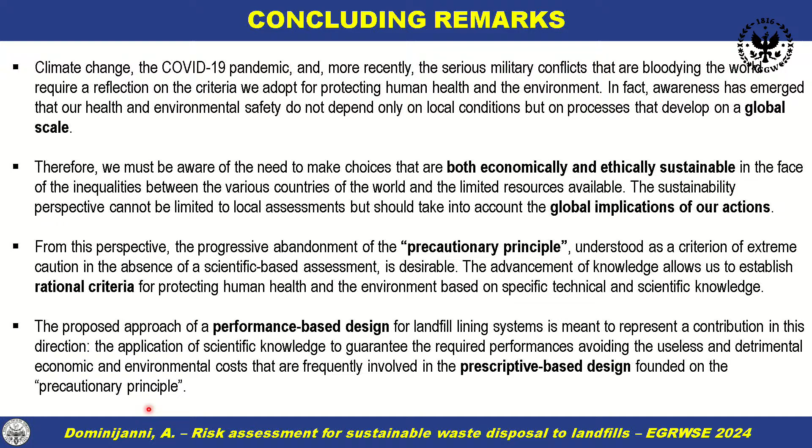From this perspective, the progressive abandonment of the precautionary principle, understood as a criterion of extreme caution in the absence of scientific-based assessment, is desirable. The advancement of knowledge allows us to establish rational criteria for protecting human health and the environment based on specific technical and scientific knowledge. The proposed approach of a performance-based design for landfill lining systems is meant to represent a contribution in this direction - applying scientific knowledge to guarantee required performances, avoiding the useless and detrimental economic and environmental costs frequently involved in prescriptive-based design founded on the so-called precautionary principle. Thank you very much for your attention.

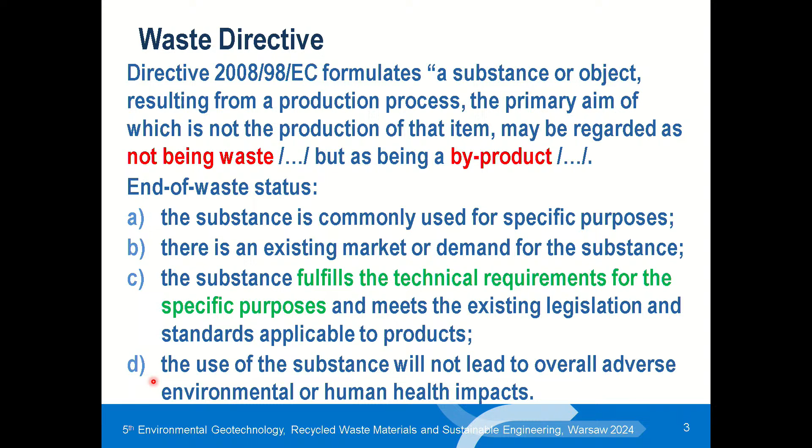End of waste status takes place if the 4 conditions listed in the slide are met. It is not very difficult to fulfill these requirements. One of them is that the substance fulfills the technical requirements for specific purposes and meets existing legislation and standards applicable to products. We know that in many countries we have these requirements.

The directive also reports possible categories of waste for which end of waste specification and criteria should be developed: inter alia, construction and demolition waste, some ashes and slags, scrap metals, aggregates, tires, textiles, compost, waste paper and glass. The Commission is preparing a set of end of waste criteria for priority waste streams, but unfortunately only for iron, steel, aluminium and copper scraps and glass cullet - waste types that have accumulated in very small quantities.

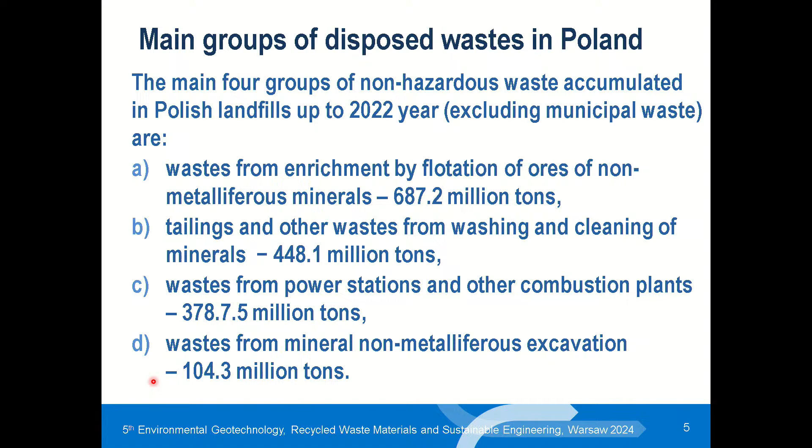After this introduction, let's take a look at the situation in Polish landfills. The main 4 groups of non-hazardous waste accumulated in Polish landfills up to 2022, excluding municipal waste, are: waste from enrichment by flotation of ores of non-metalliferous minerals - I will use the catalog names, waste catalog names - tailings and other waste from washing and cleaning of minerals, waste from power stations and other combustion plants, and waste from non-metalliferous mineral excavation. You can see the numbers of million tons accumulated only in Poland.

Oh, okay. It was sleeping.

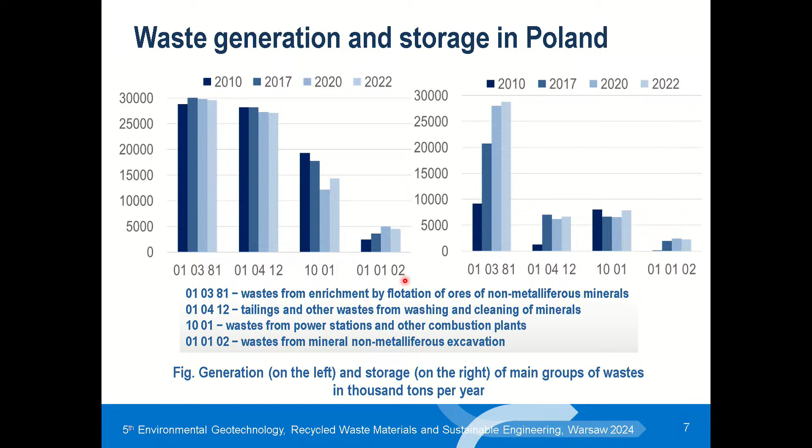The next figure shows us the generation on the left and storage on the right of the main groups of waste in 1,000 tons per year. We can see that the problem of waste utilization has not changed over the years, even after the EU directive came into force, and it did not change after 2020, when it was a deadline for better application.

Other groups of waste that will be described during my presentation are accumulated in much smaller quantities: waste materials and elements of construction and road infrastructure, and slag from smelting processes, from blast furnaces and steel plants. These wastes have many possibilities of utilization, and we should know that waste generation from the construction industry constantly increases. In highly developed countries, construction waste constitutes over 17% of the total amount of waste from business activities and households.

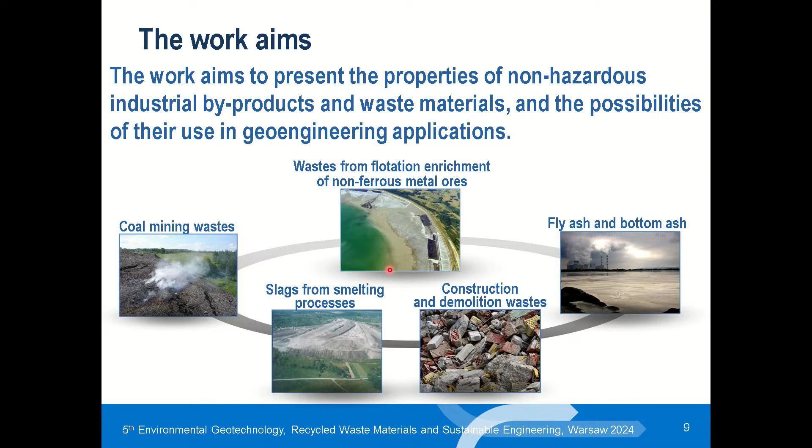My presentation aims to present the properties of non-hazardous industrial byproducts and waste materials, and the possibility of their use in geoengineering applications. I will focus on the four groups mentioned, and each material will be characterized by minerals, graining, and other properties.

So we start with coal mining waste. You should know that coal mining waste is a very large group, consisting of several catalog numbers of waste.

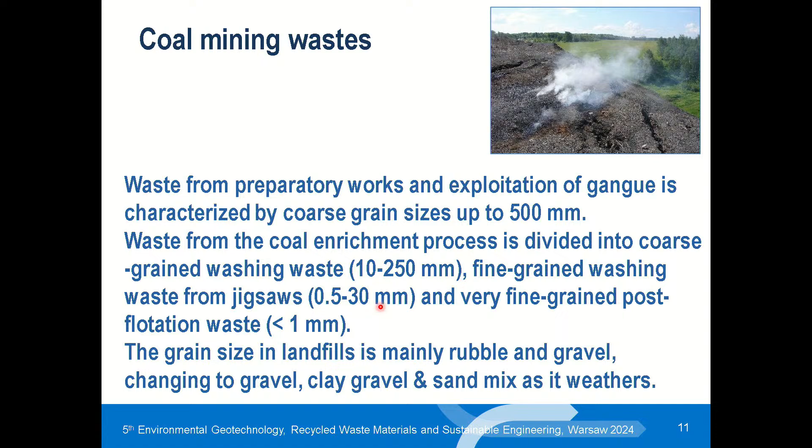Waste granulation depends mainly on waste generation technology. Waste from preparatory works and exploitation of gangue is characterized by coarse grain size up to 500 millimeters. Other, more fine waste from the coal enrichment process is divided into coarse washing waste, fine washing waste from jigs, and very fine post-flotation waste. The grain size in landfills is mainly rubble and gravel, changing to gravel, clay gravel and sand mix as it weathers.

I would like to summarize advantages and disadvantages of this waste. Due to the wide grain size range, they show a large dispersion in the values of geotechnical parameters. Most of it is well granulated and well compacted with high values of strength parameters. The exception is waste with a predominance of sandstone. The disadvantages of coal waste are lack of resistance to weathering, loss of load-bearing capacity after irrigation of the waste, and the possibility of spontaneous combustion.

The next is waste from flotation enrichment of non-ferrous metal ores. It is specific Polish waste because we have an enormous amount of this waste, and the largest landfill in Europe built of this waste. The petrographic composition of post-copper waste from the copper district in Poland consists mainly of sandstone, dolomites, calcite, and shales, and the mineral composition is silica, carbonate minerals, and clay minerals. The main problem is the content of copper, because it is about 20 times greater than in soil used for agriculture, but I would like to point out the content of lime in the waste.

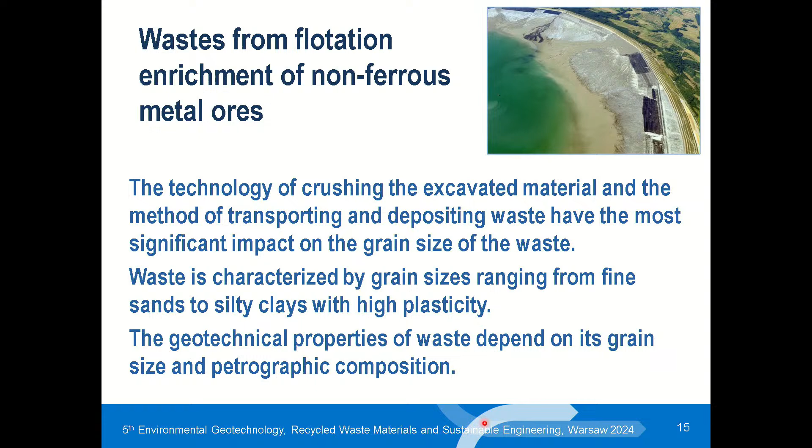The technology of crushing the excavated materials and the method of transporting and depositing waste has the most significant impact on the grain size of the waste, and it is characterized by grain size ranging from fine sand to silty clays with high plasticity, and geotechnical properties closely depend on the grain size and petrographic composition. The main advantage is the high content of carbonate minerals, which practically eliminates the transfer of heavy metals into solution, but the disadvantage is a high content of heavy metals, especially copper.

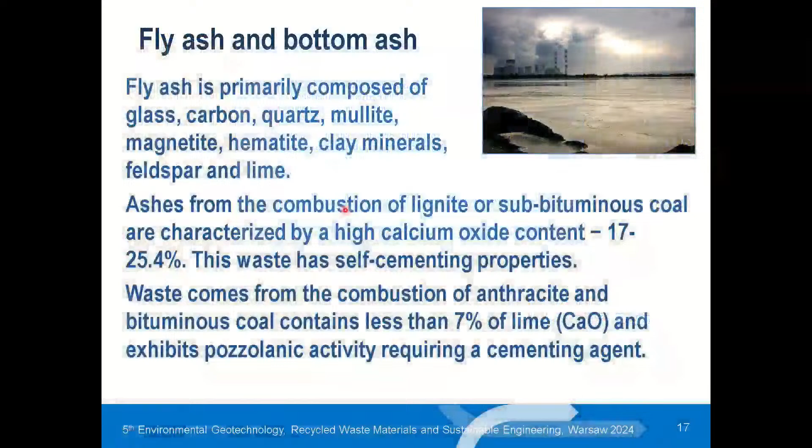The next is my favorite, fly ash and bottom ash, because I spent my whole life researching fly ash. Fly ash is primarily composed of glass, carbon, quartz, mullite, magnetite, hematite, clay minerals, feldspar, and lime. We should know that ashes from combustion of lignite or subbituminous coal are characterized by a high calcium oxide content of about 25%, and this waste has self-cementing properties.

Waste from combustion of anthracite and bituminous coal contains less than 7% lime and exhibits pozzolanic activity requiring a cementing agent. The grain size is different; it depends on the kind of waste. Fly ash corresponds to silt. Bottom ash in its natural state corresponds to medium sand to gravel, or sand and gravel mix. But the fly ash and bottom ash mixture's graining depends on the technology of storage and kind of landfill, whether it is a landfill or a wet reservoir.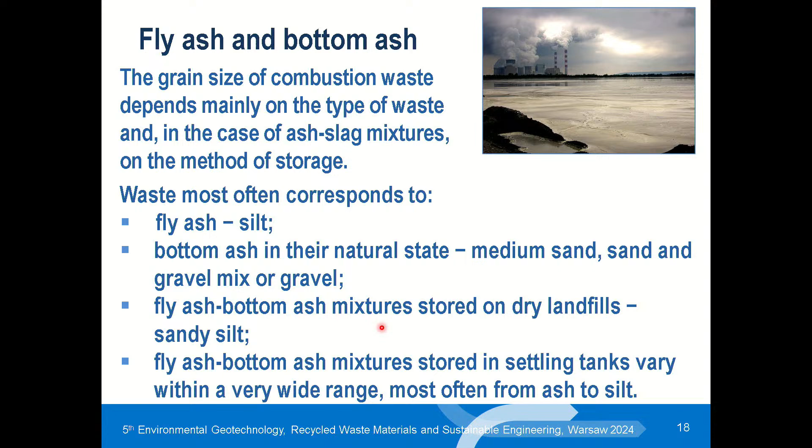You can see that fly ash and bottom ash have many advantages: binding and pozzolanic properties, significant variability in grain size due to compaction or frost, lightness of the material, large angle of internal friction, and high CBR values that increase over time.

Waste which is embedded in the earth structure swells only in the absence of total load. They have low permeability and water absorption, but it can be advantages or disadvantages depending on the application. Disadvantages include low resistance to erosion, and we come back to hydraulic conductivity and absorption.

If this waste is not very well compacted, it may be a problem in the future in strength. The next is slag from smelting processes, and the exemplary blast furnace slag from one of the Polish steelworks. Its content is given on the slide. The content of steel slag is quite different, as you can see below.

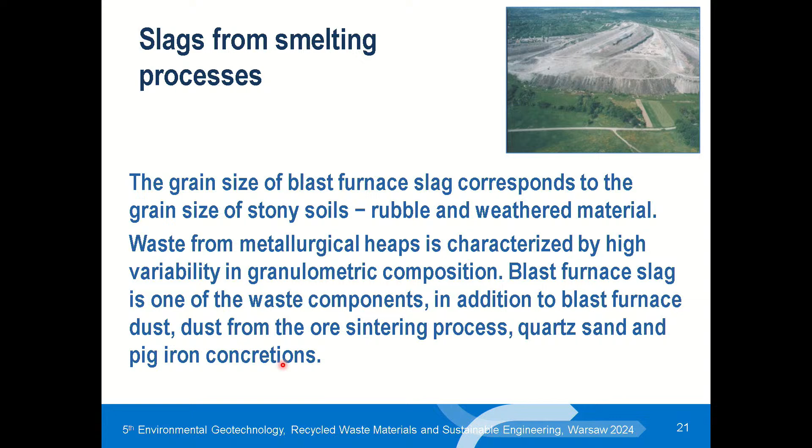Waste from existing metallurgical heaps is characterized by high variability in granulometric composition. It depends on the type of waste which was disposed, but nowadays this type of waste is disposed separately. Advantages are high compressive strength, high angle of internal friction, and low water absorption. Fresh slags are subject to a disintegration process and volumetric stabilization of the material, and slag has high compressibility and is sensitive to moisture.

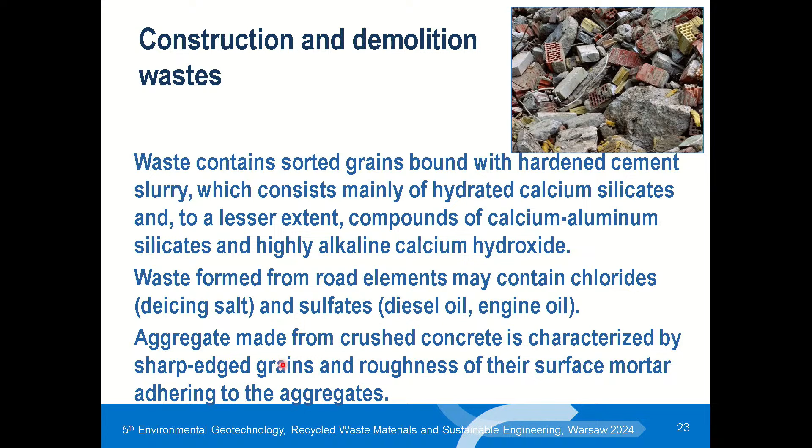The last group is construction and demolition waste. Waste contains sorted grains bound with hardened cement slurry, which consists mainly of hydrated calcium silicate, and waste from road elements may contain chlorides and sulfates from diesel oil and engine oil. Aggregate made from crushed concrete is characterized by sharp-edged grains and roughness of the surface mortar adhering to the aggregates.

Water absorption is 10 times higher than indicated in the case of limestone aggregate. Frost heave and water absorption limit the use of concrete rubble for incorporation above the groundwater table and below the impact of frost, and use of gypsum waste should be limited too.

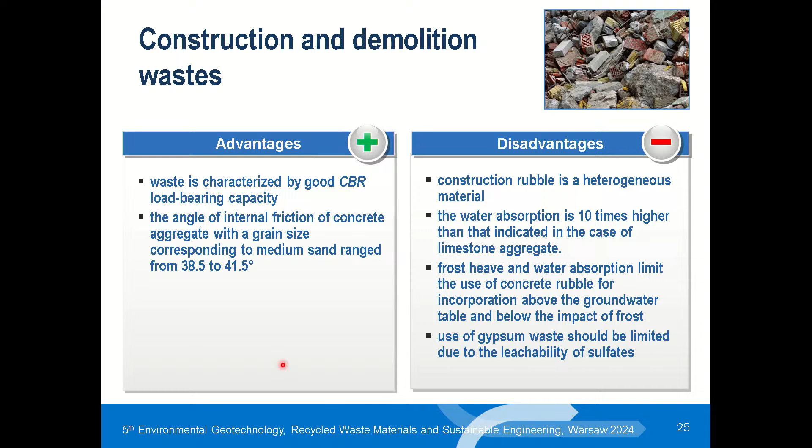My next slides focus on the possibility of their use, taking into account the properties which were described, and the main volume of this presentation will concern construction of embankments and construction of sealing layers.

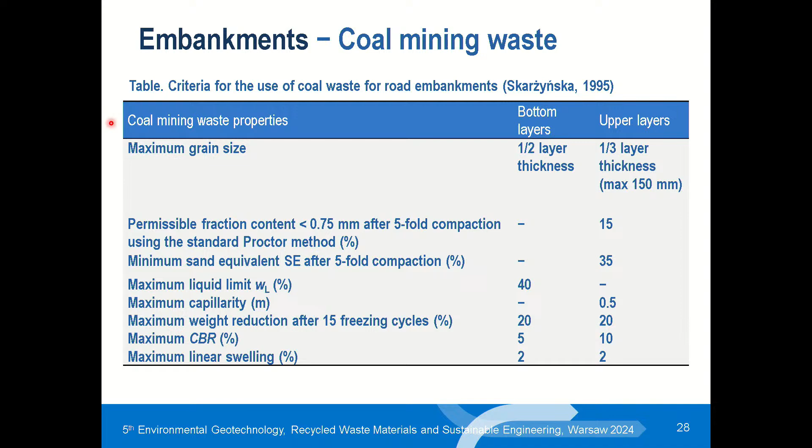So we start from embankments and from coal mining waste. As I said earlier, most coal mining waste is well compacted, and is a good material for the construction of road embankments. The table presents the criteria for using coal waste for road embankments, for the bottom and upper layers. Coal waste incorporated into embankments has a risk of spontaneous combustion when the content of flammable parts exceeds 30%, and in highway embankments the organic content should be limited to 20%.

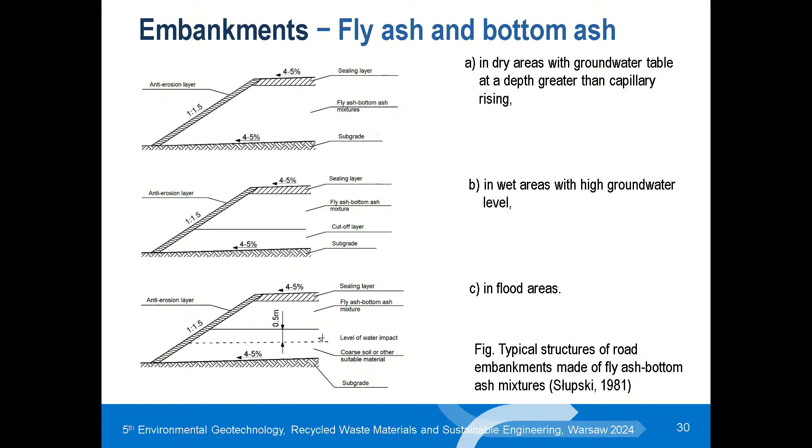You can see at figure A that directly they can only be constructed in dry areas. When we have wet areas with high groundwater level, we should have a cut-off layer or use a geomembrane. In flood areas, a cut-off layer should be given too.

While forming embankments, the most important thing is the appropriate compaction of the waste. Dynamic compaction destroys waste grains, and crushed spherical grains with larger dimensions are filled with smaller grains, which improves their packing without the need to increase moisture content.

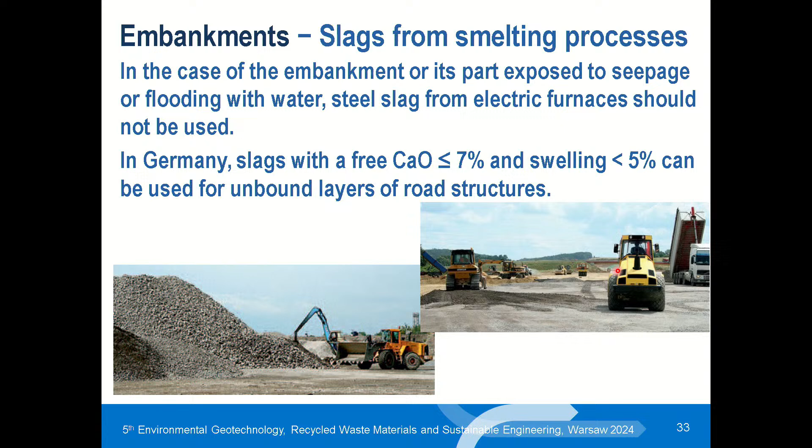The next is slag from smelting processes. I said earlier that we have a problem with irrigation of this material too. So they should be incorporated in the same way as fly ash, because saturation of the sample with water may cause a 50% decrease in the value of internal friction angle. So on flood areas, we should give a cut-off layer too, and incorporate material above the level of flood.

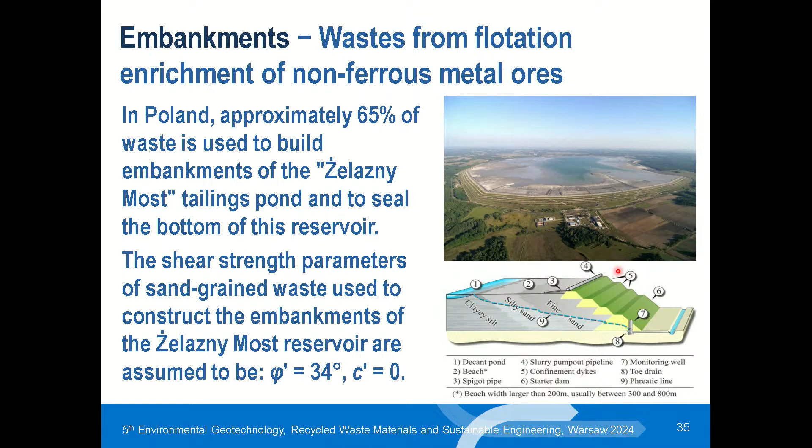The next is waste from flotation enrichment. Because of the high content of heavy minerals in the waste, nearly 65% of this waste is used to build embankments of the Żelazny Most tailing pond, and to seal the bottom of the reservoir. It depends on the graining of the waste.

Construction industry waste can be used both in the load-bearing layers and the foundation, and for concrete mixture, but construction rubble containing ceramic waste, concrete mortars, soil, etc. can be used only to build the body of road surface and prepare the ground for construction of the road. Materials incorporated into embankment structure should have a frost heave lower than 50 millimeters, defined as the maximum increase in height of the sample in 96 hours. Material that does not meet the condition should not be installed within 45 centimeters of the surface.

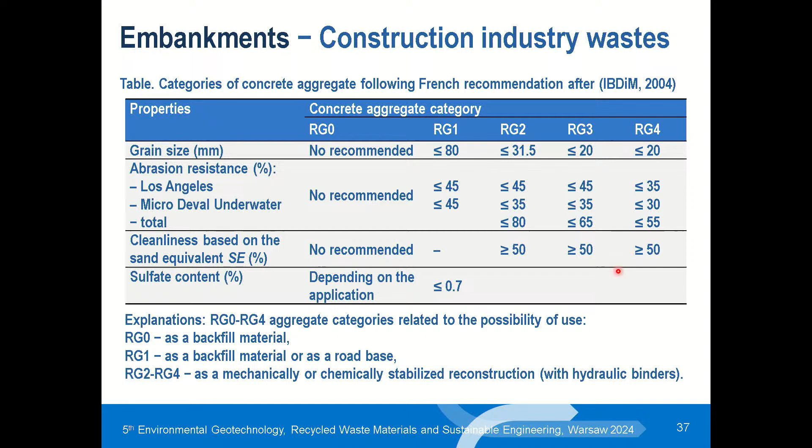On this slide we have categories of concrete following the French recommendation, and after this French recommendation we have 5 different aggregate categories related to different use, as backfill material or road base, or groups 2, 3, and 4. They can be used as mechanically and chemically stabilized construction.

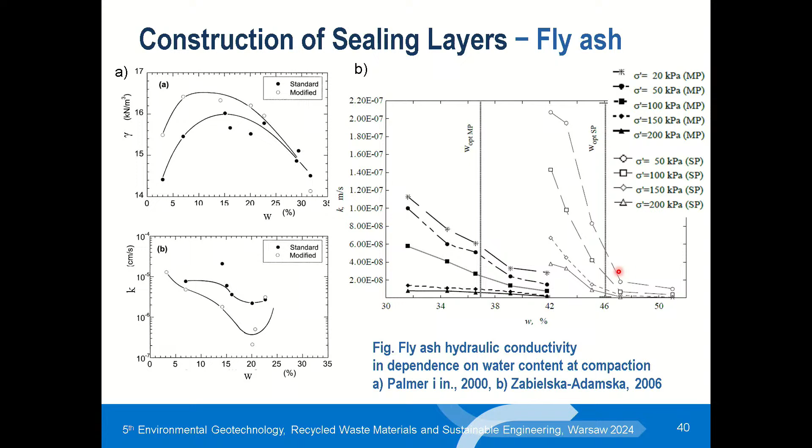And last, improvement of the ground. For improvement of the ground we use blast furnace slag, burned colliery shale, mining stone, and crushed building materials. Fly ash is used as a substitute for cement, and slag as a filler when performing subgrade reinforcement using soil fracturing. In case of compaction grouting, fly ash can replace more than 50% of cement.

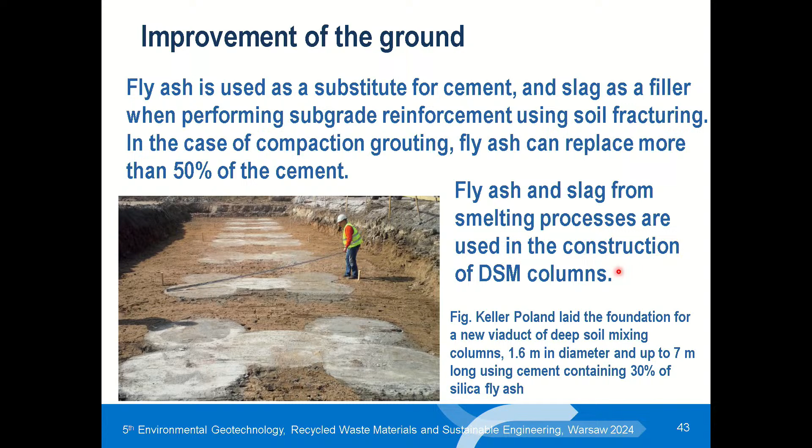Fly ash and slags from smelting processes are used for construction of DSM columns, and we can see the Keller Poland photo with this structure.

And in conclusion, the first point is general. I would like to read the second and third. The second is: anthropogenic soil is a valuable waste material with many possible uses, and geotechnical parameters of waste incorporated into our structures often exceed the values obtained for mineral soil corresponding to their grain size. And preparation of the end-of-waste criteria for priority non-hazardous industrial waste streams should be accelerated, especially since the technical requirements for geotechnical application have been known for many years. Thank you very much for your attention.

Thank you very much, Professor Katarzyna. We had three excellent presentations: by Krishna on biochar, Andrea on contaminant transport, and Katarzyna on anthropogenic materials and their utilization for modern day construction. Thank you very much for being with us, and over to Magdalena now. Or Pietro, would you like to say something? I would like to ask our distinguished guests to come up to the stage for the group photo and for the souvenirs, because you fully deserved appreciation for the effort you put into such wonderful keynote lectures. I think we all agree on that. Thank you.